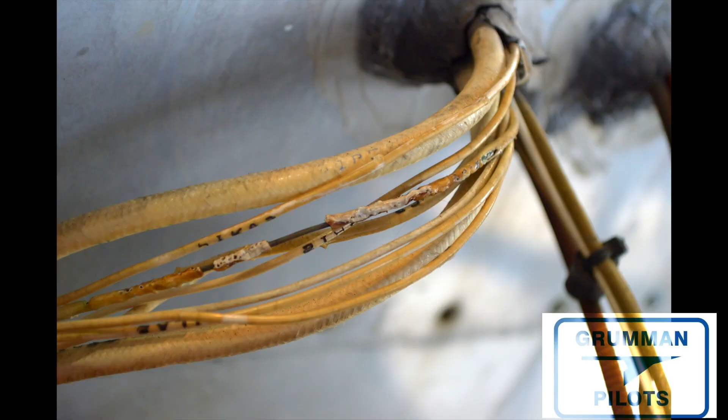We're used to seeing wires in bundles like this, and you'll notice there's little black lettering on each of those wires. How do you decode those letters in your DC power system, and if you have an AC power system, how do you decode those wire numbers? Let's take a look at them. There are all kinds of diagrams, like here you can see one at the very top, 51 PC1, and we're going to talk about what all those are. So stay tuned while we decode.

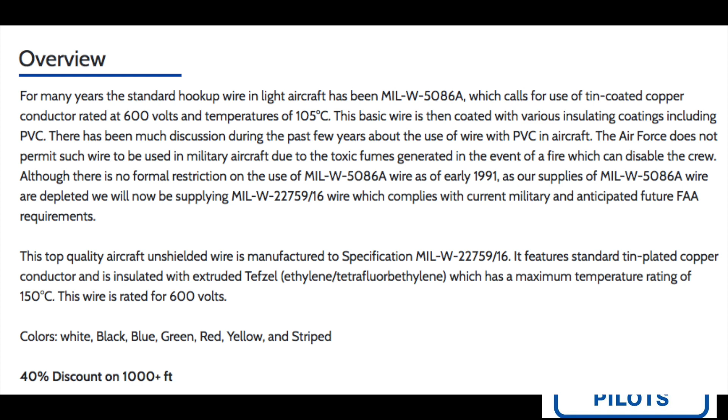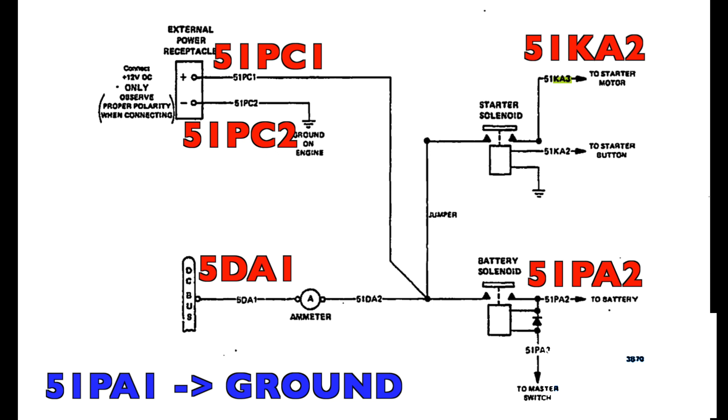Now, since we're talking about wires, let's make sure you're using the correct legal wire in your system. And here's some Aircraft Spruce. You want to make sure you have the right mil-spec number on that wire. And then here's a wiring diagram. As you can see, the ones in red are number 2 cables, and you can read the numbers right there, like 51PA2 and 51PA1, which was in blue because it's not shown in the diagram right there. But anyway, those are the numbers that are all right there in those diagrams, and they tell you a lot of information about that wire.

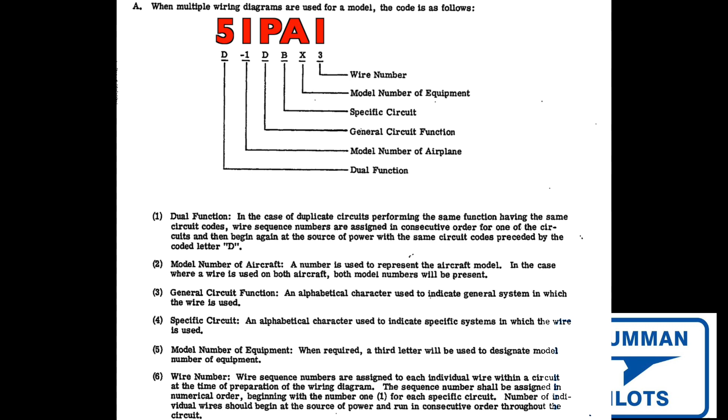Now, when you take a wire out of a wire bundle and you get a number, you can decode that number. First off, if it's a dual use, you'll have a D, but then you'll have the circuit it's on, the 2-letter identifier identifying the electrical load circuit that it's on, and then finally you'll have a model number for the aircraft, and you'll have a position that you're in. So again, not complicated to see.

So we can see that 51KA3 - well, the KA is going to tell us in a minute that that is assigned to the starter. But what it doesn't tell you is what is the length of your wire? What are the connectors that are on that wire? And what is the gauge of the wire? Is it number 2 gauge wire, which is your main battery, your main terminal, ground, or your starter cable?

Then you have the number 4 cable that runs to the alternator. Then you have the number 4 wire that runs all the way into the engine and into the cabin. And then you have the number 6 wire that feeds the bus. So again, it doesn't tell you what color the wire is. It doesn't tell you the gauge of the wire or the connectors on the wire, but it tells you pretty much everything else that it does.

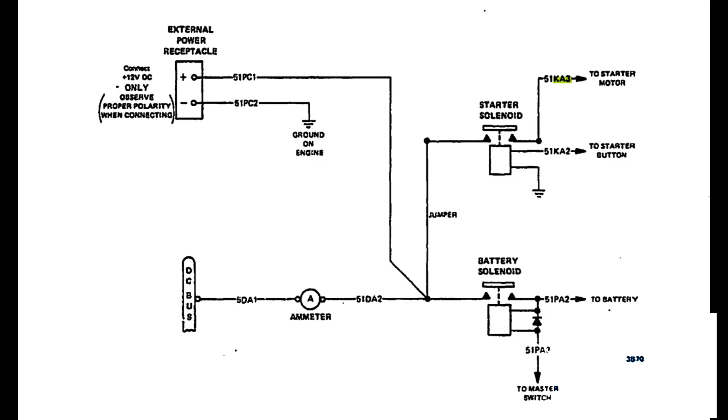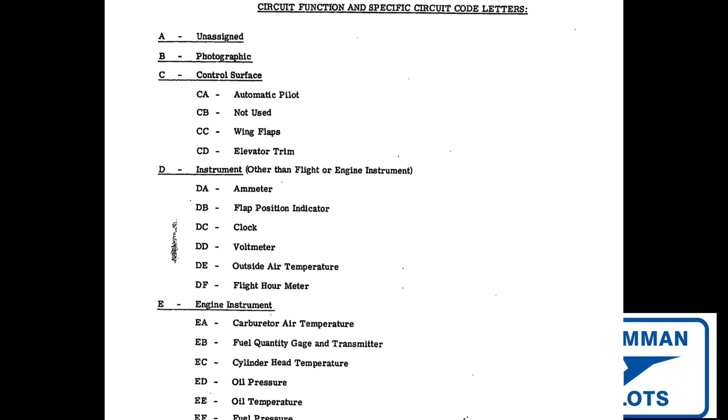Now, when you're decoding a particular circuit, you may notice numbers like 5DA1. Then you might have a 51DA2, and there's a difference between that. Now, you can look at all these numberings, and we're going to have a chart here in a minute. It does not use all the letters of the alphabet. So some of the letters are missing, some are not used, and some are unassigned.

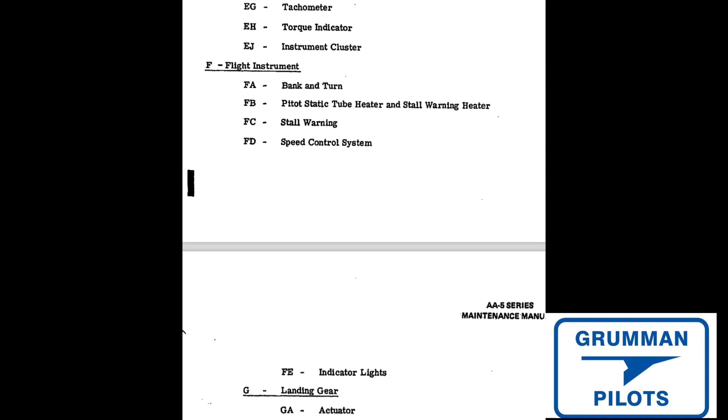But the nice thing is that when you look at that numbering system, such as if you have a wire that says 51 and some number, well that 5 and that 1 tell you that that wire is found on both the 5 series and the 1 series. So you have it in the 2-place and the 4-place, the AA5s and the AA1. So if a wire starts out with 5-1, it's on both aircraft, so you'll find it in both maintenance manuals. If it's just a 5 or it's just a 1, that pretty well tells you whether it goes to the 4-place airplanes or whether it goes to a 2-place airplane. So that's what the first numbering does.

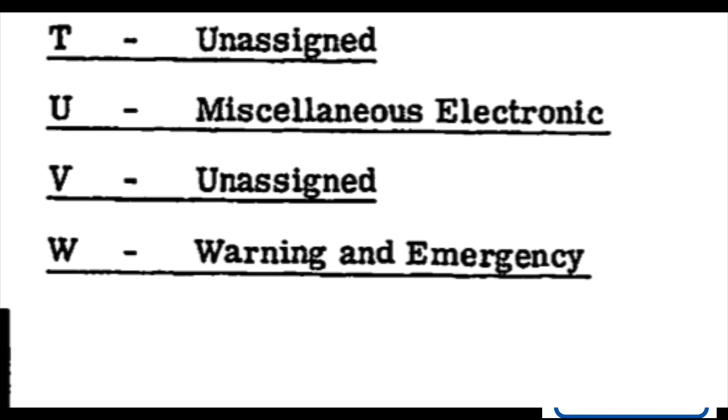I don't believe that we have any D's on our numbering, but once you have that list, here's the complete list. So you can see that everything's in there, like F for flight instrument, E for engine instrument, L for lighting, K for the engine, and then the particular circuit for power for the starter was the KA circuit. So there's a lot in there. And then also, there's some other information you might want to look at in the maintenance manuals that can make your job a lot easier when it comes to determining what these wires do.

And then here's one of the most interesting slides talking about the wires, that it says when color coding is employed, here's what you need to do.

For each of the functions, there's a color that goes with it, so you'll see colored wires in our airplane. We're used to seeing the white Teflon-coated, copper wire that we use all the time in our systems, usually white with a Teflon coating, but it's available in other colors. Even the big number 2, 4, and 6 cables are available in a wide variety of solid colors as well as stripes.

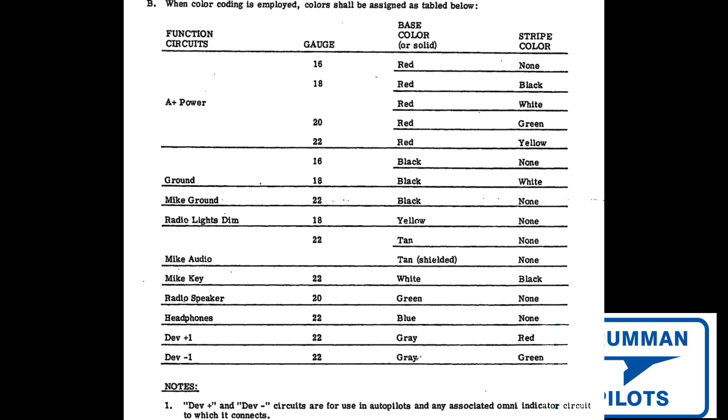They're using Teflon on wire now because the PVC they used to use, when it burns, creates toxic fumes, and the military and most commercial airlines aren't using it anymore. So that's why they've gone to Teflon wire.

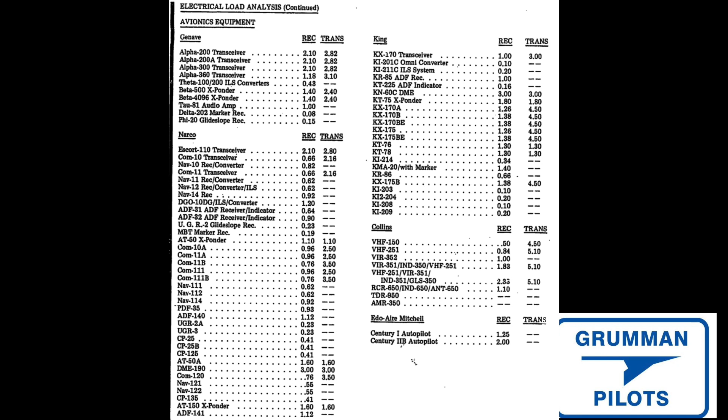A fun, interesting read in the maintenance manual is the loading for each of the circuits in your aircraft - whether it's your alternator, your lighting, your stall warning horn, or your pitot tube. For each of those circuits, it gives you the load and the number of amps that go through that circuit so you can better plan your fuse systems and the wire that goes along with it.

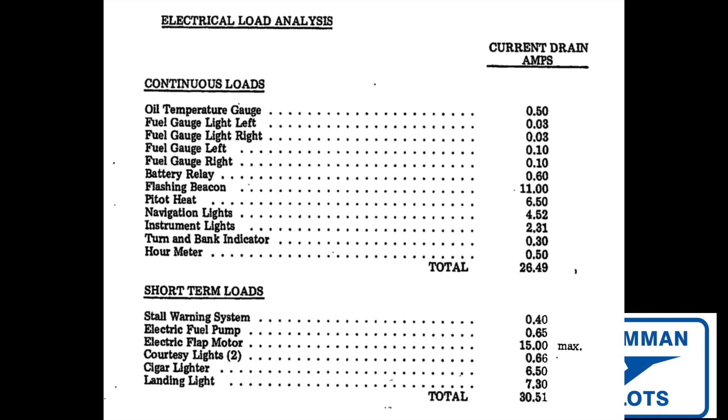So that was quite a bit of information to digest on the wiring, but it'll be easy once you start working on the airplane. You want to take those wires and change them all out, and while you're there, you're probably going to want to change out the relays and other stuff. It's not a hard job.

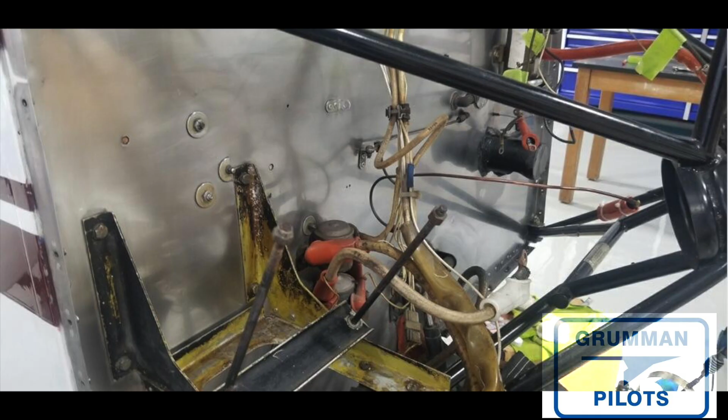Crimping the connectors on the wire can be a bit problematic, but with hydraulic presses there's nothing complicated about making these wires. You can buy the connectors and the wedgers that you use with a hammer to drive them down. But while you have it all apart, get it all clean and get all the connectors on there.

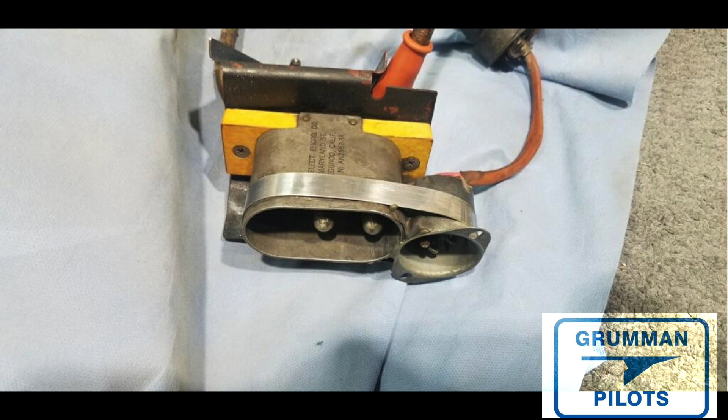The nice thing about doing it with new wires, new connectors, new relays, and new hardware is how much faster your engine will turn over, because you're not losing any voltage to resistance in the wires and relays. So it can make a big difference.

If you're having a problem cranking your aircraft, you might want to look at the connectors first, then maybe the cables, and then finally get to the relays. So that's a lot to take in for working on your airplane, but as long as you've gone this far, you might as well go a little farther and do a top-notch job.

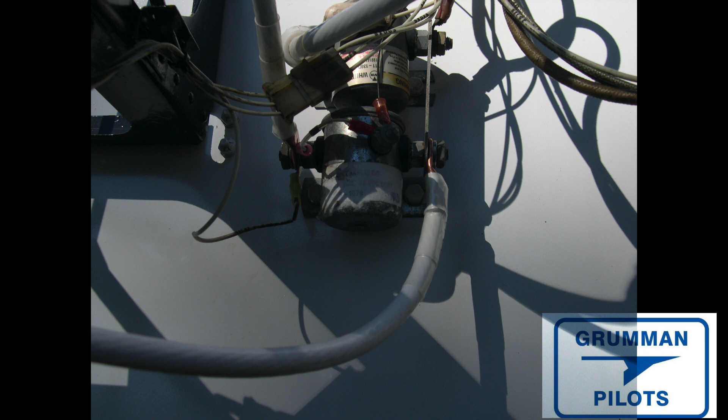Not only will the new wire, connectors, and relays work really well, but there's a number of ways you can make those cables up, and we're going with the Jimmy Candeletti AGAC style that Hartman Aviation used to use.

When you make up a cable, you get some of that braided loom and it goes over the cable. Then you put the connector on, and you put the heat shrink tubing on to seal the end so water and moisture can't get in to cause corrosion problems, which would cause more resistance in your cables. While you're using that heat shrink, it also holds that mesh sleeving on the outside.

It gives you a good abrasion factor on the outside of the cable to protect it when it's used in the engine compartment, and it's vented and meshed so it can let the heat out if the cable gets warm. That's another feature of making a cable. There's more than one way to make a cable - there is no single correct way, but there are many wrong ways to do it.